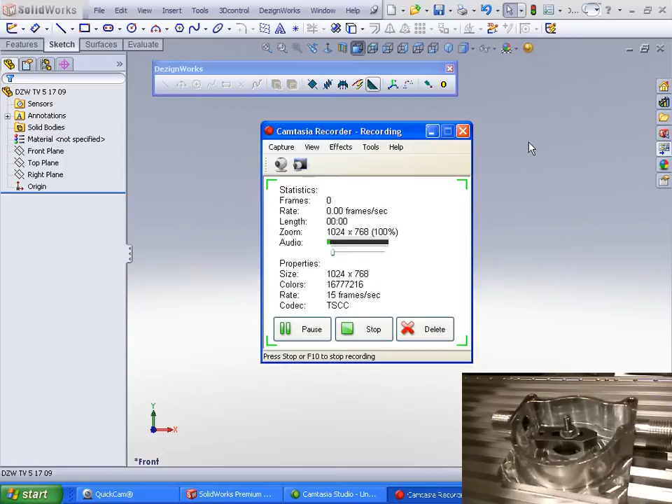In this session of Dezignworks TV, we'll be utilizing the Romer Infinite 2.0 Arm with SolidWorks 2009 and Dezignworks 9. So let's get started. The first thing you're going to notice is a new toolbar has been added to your SolidWorks application.

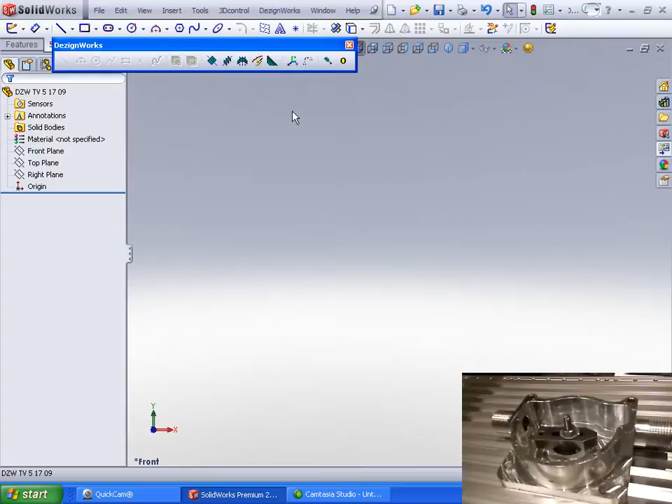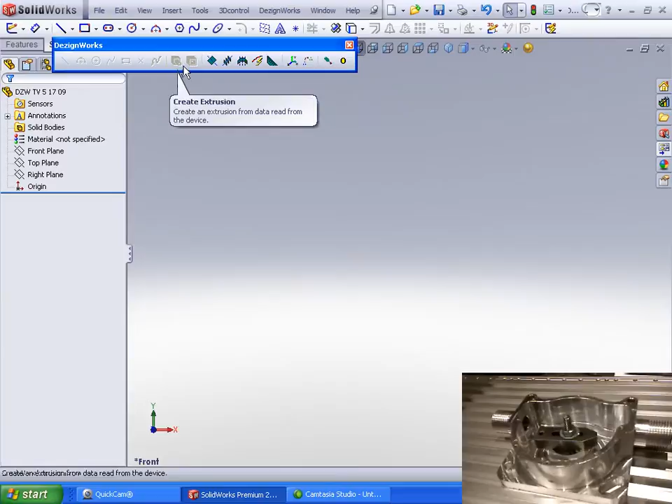Dezignworks, being a gold product for SolidWorks, is readily available to a user. If a user's been through the SolidWorks Essentials class, he should be able to do a part similar to today and actually be up to speed within about an hour of installing Dezignworks. Because of the seamless integration and similarities between the Dezignworks toolbar and the Sketch toolbar, you'll notice right away how this looks: lines, arcs, circles, rectangles, even a built-in cut and extrude. The in-depth adaptability of Dezignworks is key to making this product function quickly after purchasing.

So let's get started. The first thing you're going to notice is the toolbars are set up so you can really move from left to right.

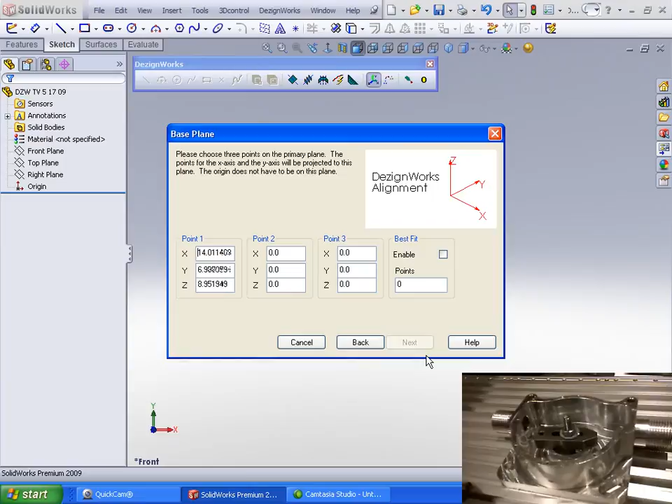First thing we're going to do is align the part to the device. In this case, we're going to use the advanced alignment. We're going to first define a base plane, similar to defining a plane in SolidWorks.

In this case, we're going to find the front of the part by using two points on the front face for our X and Y. I'm going to use edge intersection because I want this lower left corner to be my origin of 0, 0, 0. Define two points on each face.

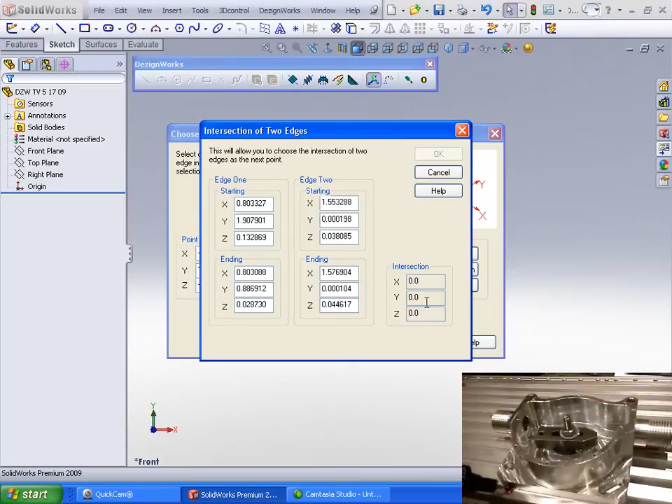Dezignworks can calibrate and actually compensate for all your probes.

Notice an alignment has been added to the SolidWorks feature tree. This is very important. Dezignworks is the only product of this type that stores the alignment in the feature tree. The value of this is you could save this part, go start a second, third, or fourth part, come back to this part whenever you want, and the alignment is stored in the tree. It eliminates you having to go re-indicate the part.

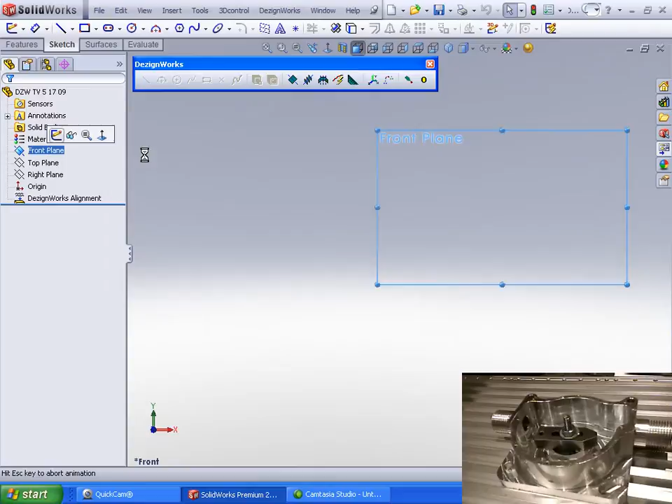So let's go pick the SolidWorks front plane, and let's outline this part. Now again, we are not going to fully constrain this part for any design intent. The intent of this video is to show you the tools of Dezignworks.

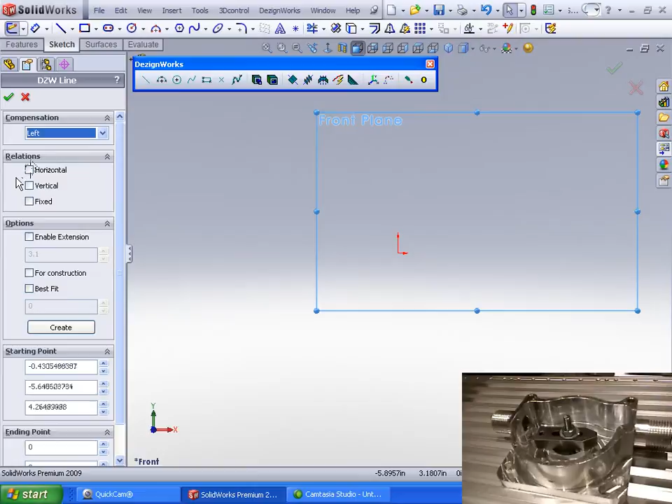Notice Dezignworks utilizes the SolidWorks property page, with full compensation for your probes. Dezignworks is the only product of its kind that actually even supports relationships. You can build design intent as you go.

So we're going to go ahead and not constrain anything and outline our part first. Notice I don't have to hold the probe flat on the part—it's projecting to the plane I picked. In this case, I picked the SolidWorks front plane.

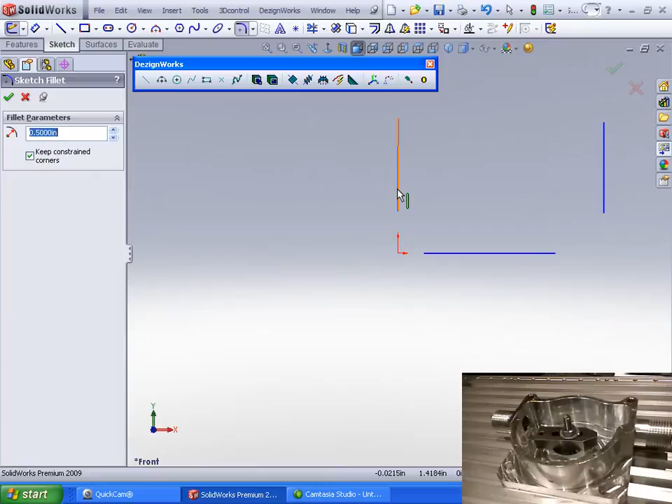You can also jump right into the SolidWorks tools. Again, here's the Dezignworks toolbar—we're probing with the probe, and we can jump into the fillet tool. So let's say our design intent, we know we want a half inch fillet. Let's go ahead and add this.

So you can see you can use all the SolidWorks sketch tools and Dezignworks tools at the same time. The top of this could be built as lines and arcs, fully constrained. To show you some of our tools, we're going to use our curve tool.

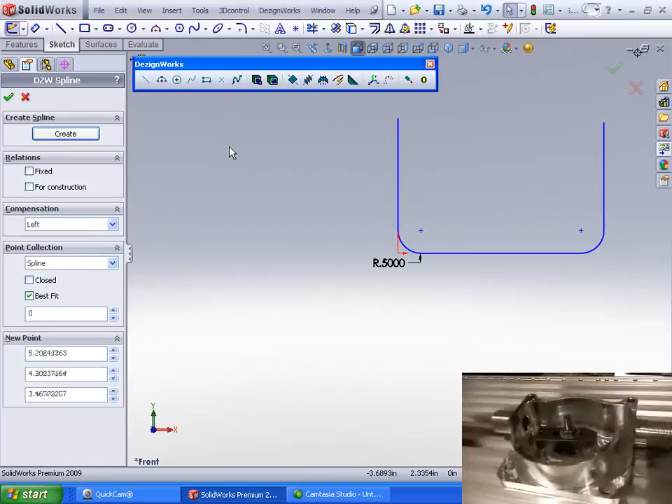We're actually going to drag this along the top. We have it set to take data about every 100 thousandths. We're going to position the probe on this face, hit the button once, and drag it. All I'm doing is keeping it in contact and dragging it around the part. When I get to a position where I want to stop, I can hit the front button and tell it to create it.

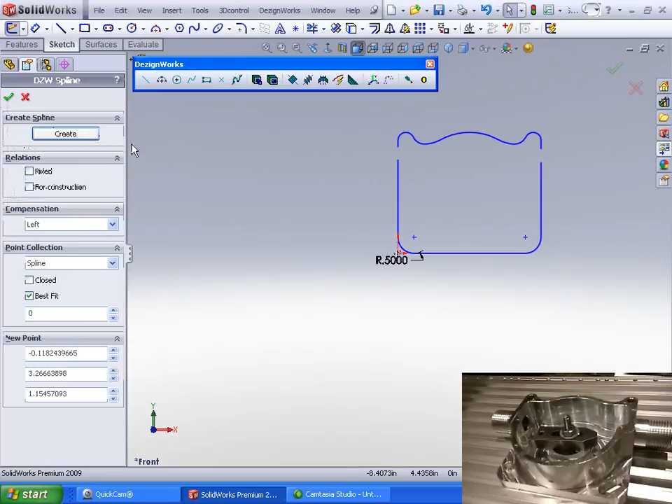Now we're going to go ahead. In this case, we may not want this to move, so we're going to go ahead and lock this base down using SolidWorks relationships. Now we'll go ahead and merge these two points together.

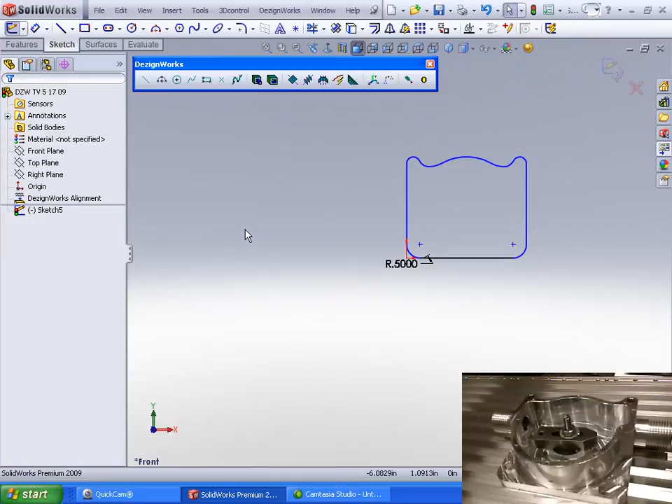Now we'll go ahead and utilize Dezignworks Extrude. We're going to hit the Extrude button and simply touch the top of the part. Dezignworks will compensate for the probe.

Notice in the feature tree, you have a fully editable part. That is a benefit of Dezignworks. Dezignworks is a true feature-based reverse engineering package. It allows you to create features, modify and change them right inside your native modeler.

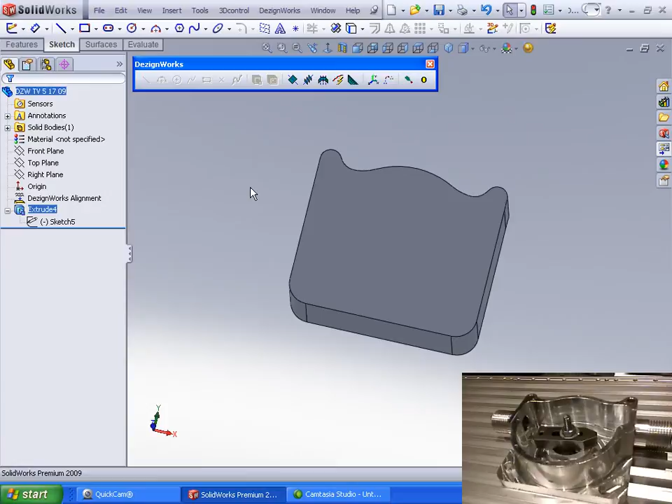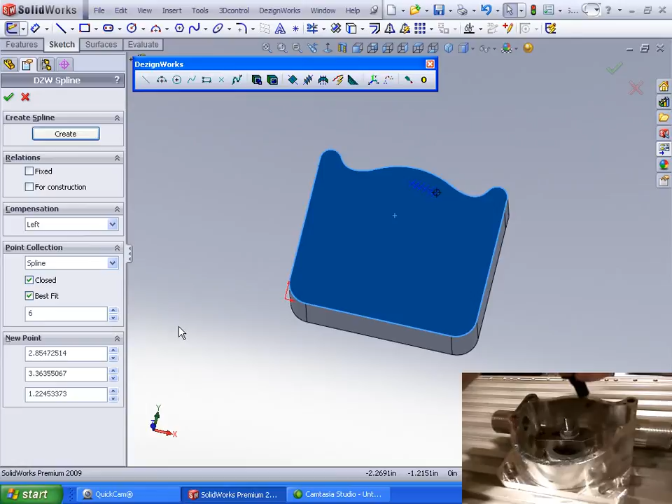Let's go ahead and cut out this area. So we're going to pick a face and start a sketch. The nice thing about Dezignworks reading the Romer arm is the arm now knows to sketch on that face. Again, we're going to use our curve tool, and we're going to tell it to automatically close this for us. So I'm going to depress the button one time and drag this around my part.

When I get somewhere close to the end, I'm going to depress the other button, and it automatically closes it for me. Now we utilize Dezignworks Cut.

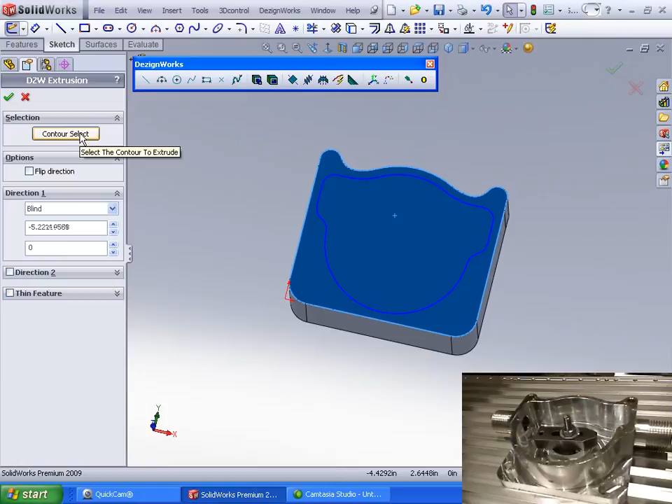Notice here there are some new features for Dezignworks 9: Contour Select, and even thin features. In this case, we'll simply hold the probe to the depth we want, depress the button on the device, and it'll compensate for the probe and do a cutout.

Now let's go ahead and cut off the front of this part. Again, we'll pick a face and start a sketch. We could fully constrain this or use our curve tool again and drag this around here, positioning it close to the part.

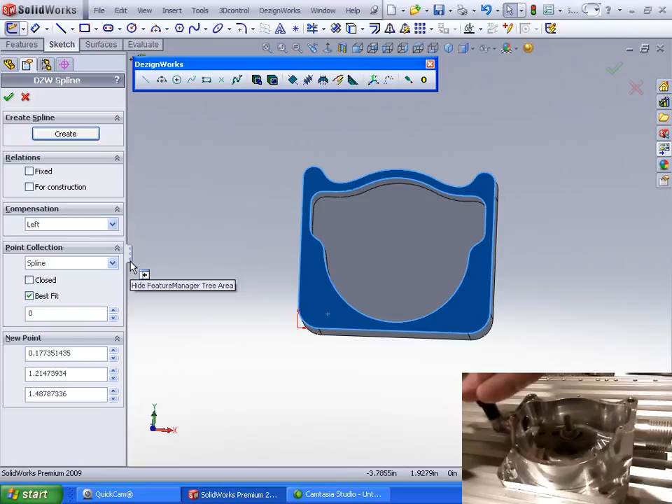Notice, I don't have to hold this any certain depth. Dezignworks in conjunction with the arm knows how to manipulate around the part. So we're going to simply drag this around our part. In this case, we'll even drag it off a little bit, and we'll create it.

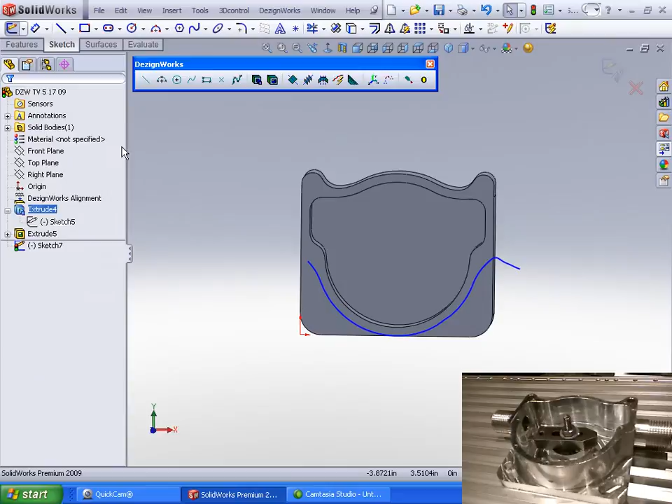Now we'll go ahead and use some of the SolidWorks tools to finish this. We'll just grab the SolidWorks line tool and go ahead and chop this piece off. Again, this could be fully constrained.

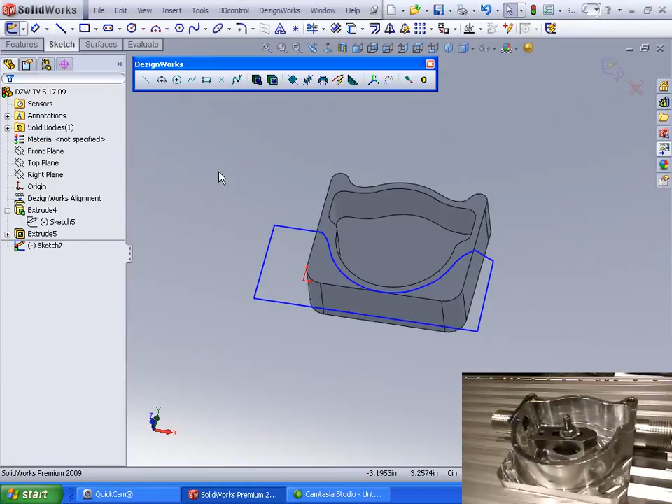The intent of the video is to actually show you the tools. So let's go ahead here and do a cut, and we'll cut this face off.

Notice the accuracy of this device. If we zoom in here, you'll see where these two faces that have been cut separately are actually tangent.

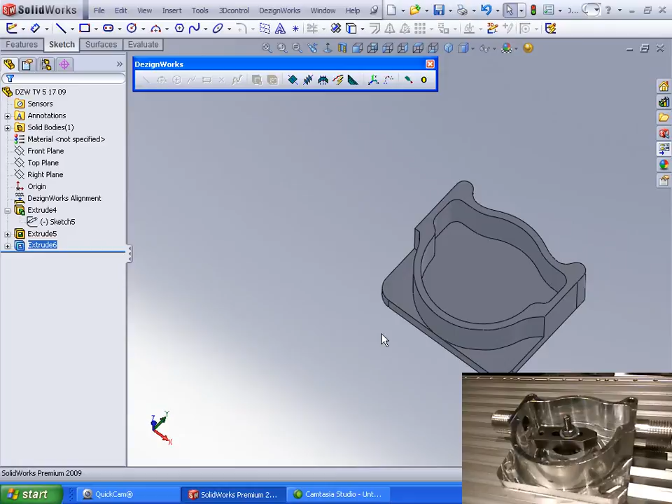Now here's a nice key feature. We can even utilize the hole wizard in SolidWorks. Let's go find out where these little tapped holes are located. Again, we're going to pick this face and start a new sketch.

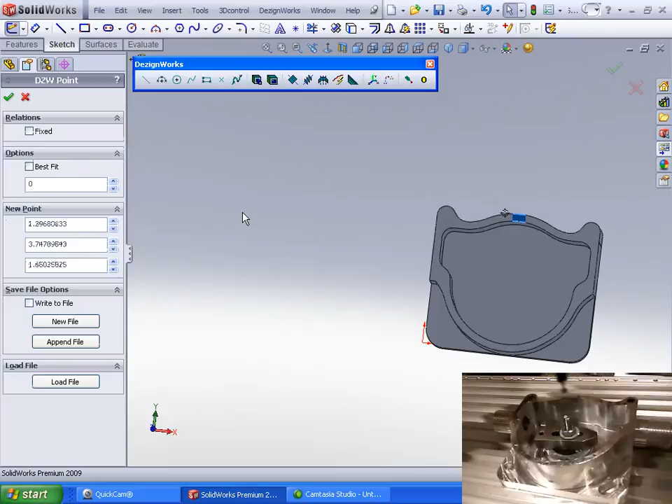We'll use the point option in Dezignworks to locate the holes. By simply placing the probe in there and finding location, we'll come back and utilize the hole wizard. So now we have all of our holes located.

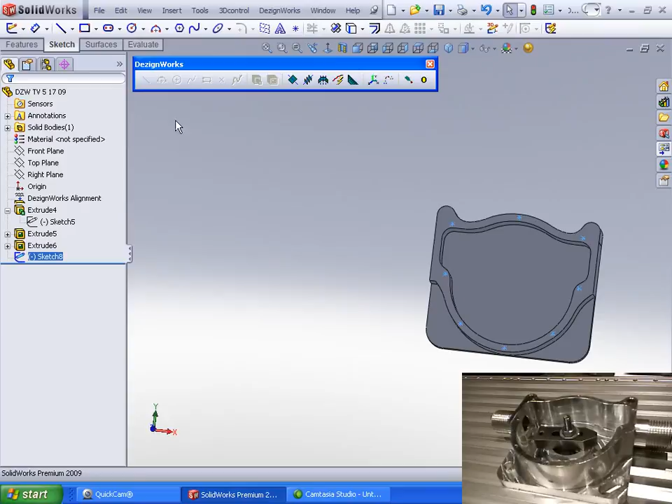We'll go ahead and exit our sketch, go to the features in SolidWorks and use the hole wizard. This will allow us to put the threads in there, and they will appear in the drawing.

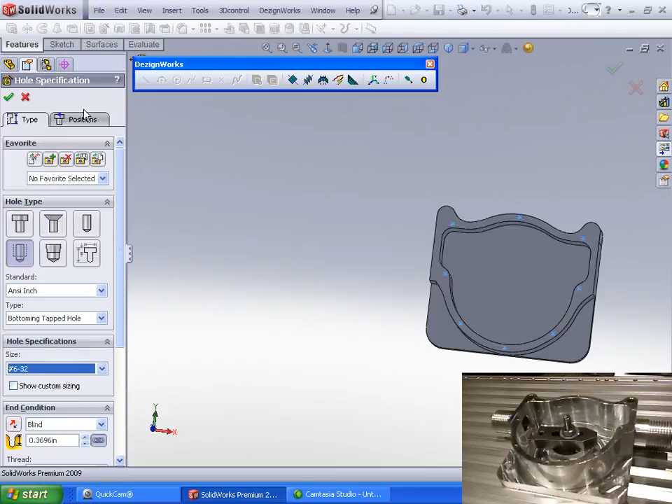So we're going to go into the type here and pick a type. I believe these are 6-32s - again, you would need to know this. For position, it will actually snap to these locations that we placed the point probe in.

There's our tapped holes.

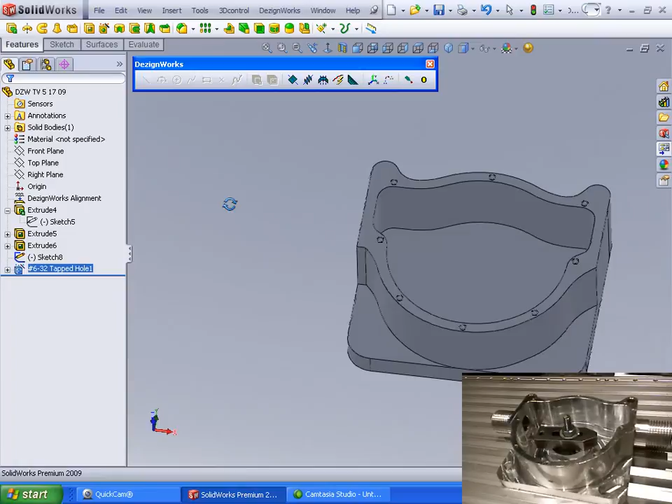Now let's go ahead and add the tubings on the side. Again, we can pick a face, start a sketch. Now the arm knows to work on that face.

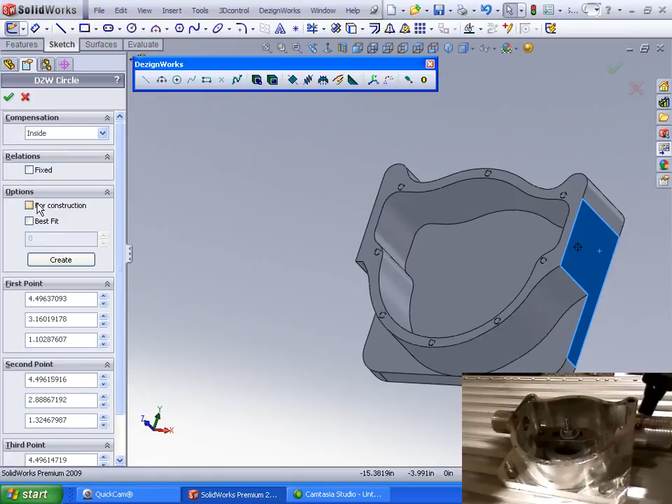So we'll simply pick the Dezignworks circle tool, tell it to compensate to the inside because we are using a ball probe, and we can take 3 points or drag it - either one will work. There's our circle. We'll tell it to extrude out to a face.

You could mirror this or repeat. Pick the face on the other side, start a sketch.

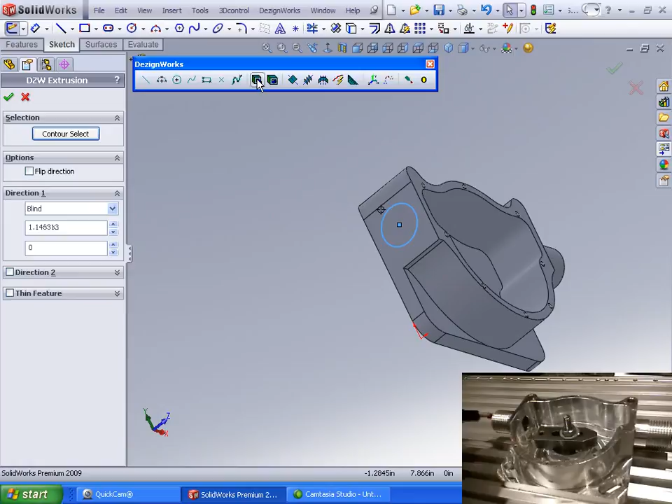As you can see from this example, this is no different than building tools right inside SolidWorks. The only difference is your digitizer tool becomes your mouse. We'll extrude out to this face.

So you can see in a very short time we can create this part. Now there's one more piece in the middle here - there's a boss. Let's pick this face and start a sketch.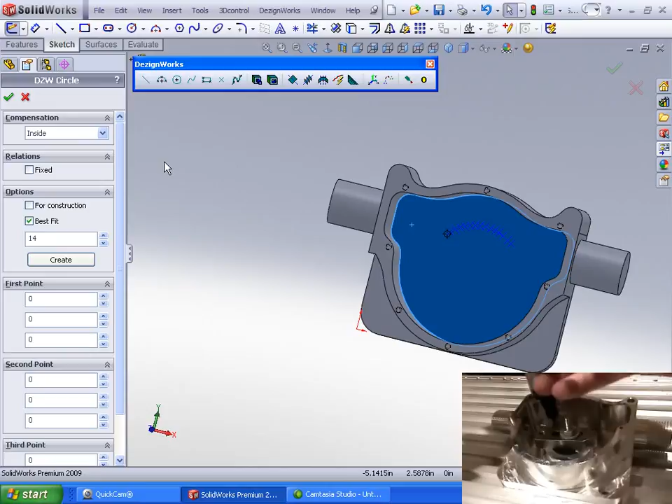Now in this case there's some clamps in there, and we want to do a best fit, so you can actually jump around the clamp. We'll take some data on this side, drag, stop, reposition, drag on this side. So yes, you can stop and jump over clamps or objects.

There's our boss, and we're going to extrude it up to a height.

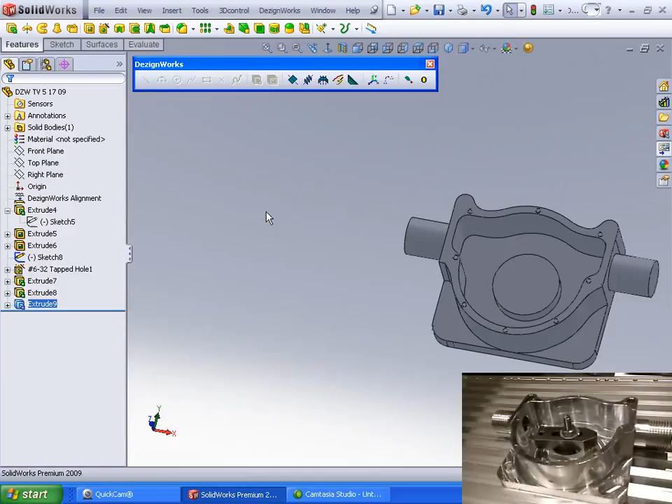Now, what if I wanted to use SolidWorks in conjunction with this? I knew what the centerpiece was. I can pick the face, start a new sketch.

You'll notice if I hit the SolidWorks circle command, it will inference the center, even though it was digitized. So all the tools apply - we can go ahead and draw right on something we digitized.

Add our dimension. So you can see, utilizing DezignWorks, you can fully constrain the model or build parts back and forth with SolidWorks or DezignWorks.

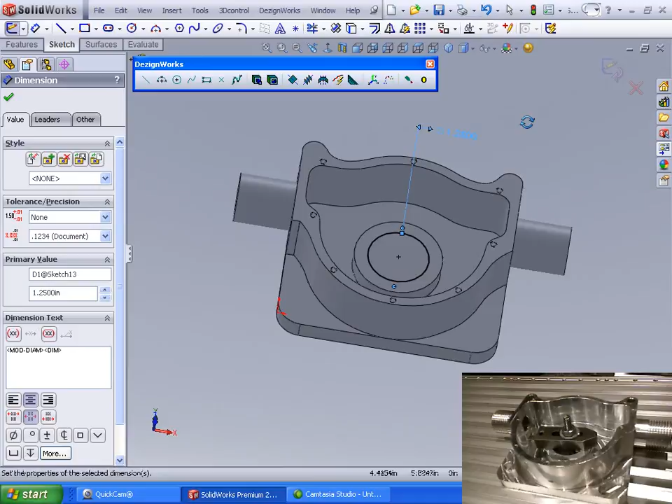We could even - now that was actually drawn and designed with SolidWorks - you could actually go ahead and do a cut extrude with the arm. So let's do that.

We drew this circle with SolidWorks, referencing a digitized tool we did with DezignWorks, and we're going to cut it down to a depth.